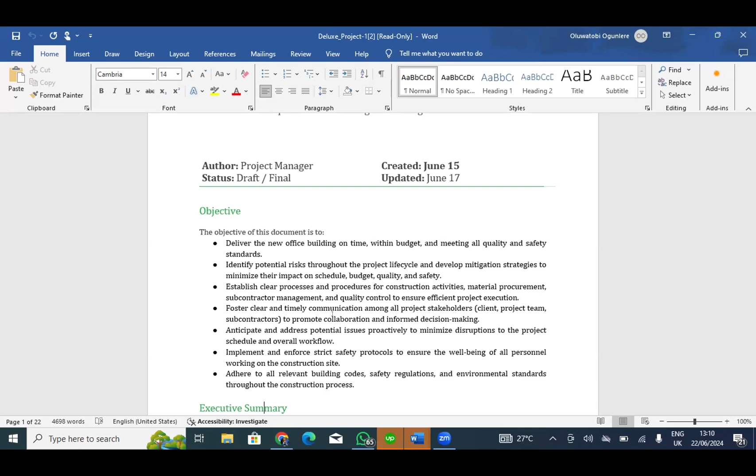Yes, we have some risks - what are the risks that could occur and how we're going to mitigate them. The first is schedule delay, maybe because of financial issues, maybe we won't start on time and the likes. The likelihood of this risk is medium, the impact is medium, and the risk rating is still medium. How to mitigate it? We're going to develop a detailed critical path method schedule with a buffer, and we're going to identify and secure critical materials early, which we have also done. We'll also maintain a contingency plan for all unforeseen events.

Who's going to be responsible? That's the project manager, which is Emmanuella.

Second, budget overruns. What if the budget we are presenting is not enough for this project? That's a high risk, and the likelihood is medium, but the impact is high, because if the budget is not enough, the project won't be able to achieve success on time. The risk rating is also high.

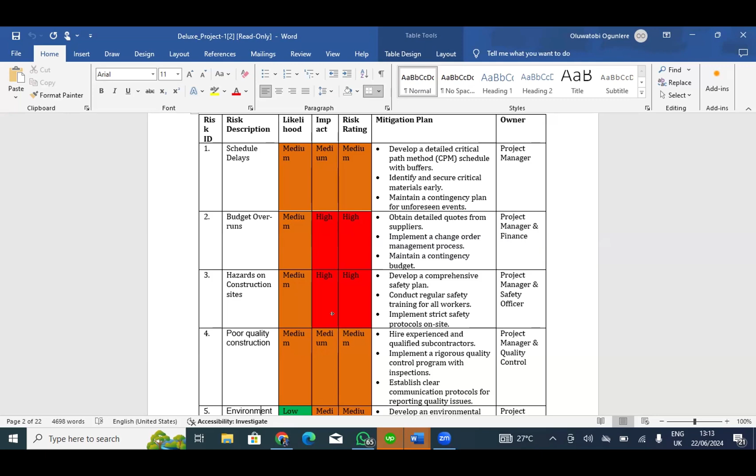The mitigation plan: we have developed a comprehensive safety plan, conduct regular safety training for all workers, and implement strict safety protocols on site. Those in charge are the project manager and the safety officer.

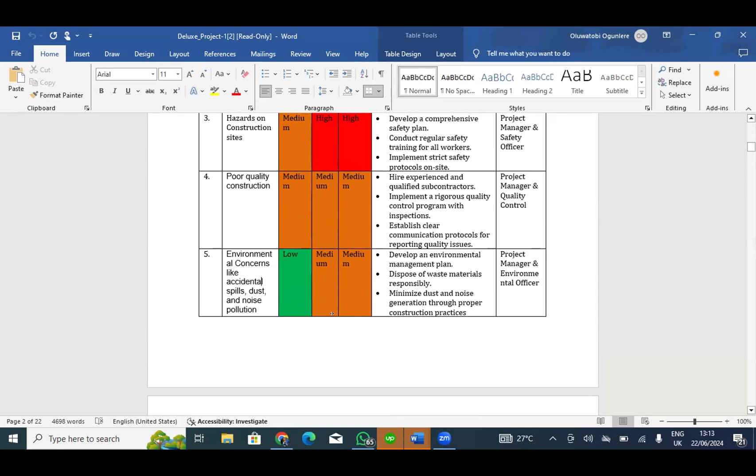There are lots more like that, such as poor quality construction, environmental concerns like accidental spills, dust, and noise pollution, delays in obtaining necessary permits, difficulty in finding workers, unexpected shortages of critical materials, encountering unexpected site conditions such as hazardous materials or weather, and client scope changes.

We know that one is very critical, where the client's scope might change. They may say they want this plan, maybe they want one side of the construction to be in another form, another design, and everything.

The impact can be low, so this is also medium, and the risk is also medium. What we're going to do to mitigate this risk is establish a clear change order process with defined approval protocols.

If there's any change, we're going to write to the client, since they are the project sponsor, and tell them we are doing this change, this is what it's going to cost, and this is going to be the duration. There should be a clear change process and good communication.

We're going to maintain open communication so we could achieve that goal, while they know that achieving it could also affect the duration of this project. So there must be a good communication balance. Those in charge are the project manager and the client's representative, Miss Oluwatobi.

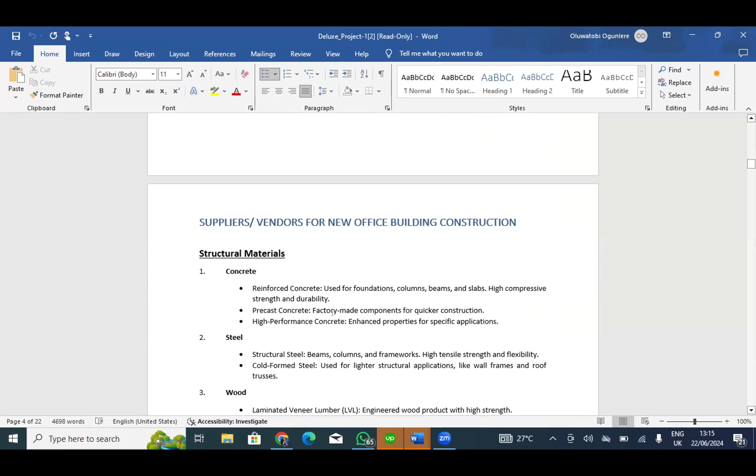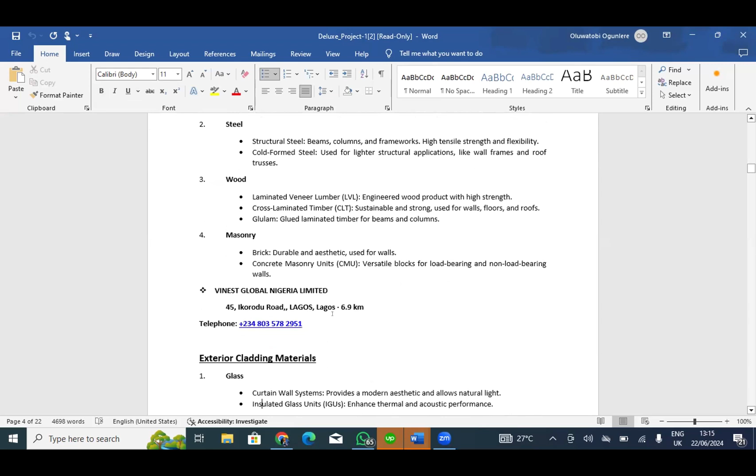We have a list of suppliers, vendors, and their addresses. Suppliers like concrete, steel, wood, and masonry we are getting from Vinest Global Nigeria Limited, at 45 Ikorodu Road, Lagos, 6.9 kilometers. The phone number is listed there.

Also, insulation materials - fiberglass insulation, foam board insulation, and spray foam insulation - we're getting from 5 Wema Terrace, Lagos, 12 kilometers, phone number also listed.

Our roofing materials, that's asphalt shingles, metal roofing, the bituminous roofing, and EPDM rubber roofing, which is also used for low slope buildings, we're getting from Wish Tech, located at 5 Wema Terrace, Lagos, 12 kilometers. We also have the phone number here.

The interior finishing materials aspect - drywall, flooring, ceiling - we're getting from Rotary Club of Victoria Island, Lagos, at number 28 Awolowo Road, Ikoyi, Lagos.

Also sustainable, innovative materials such as green concrete, bamboo, recycled steel, low-e glass, phase change materials, and the like, we are getting from Vinest Global Nigeria Limited, about 45 Ikorodu Road. We also have the number there.

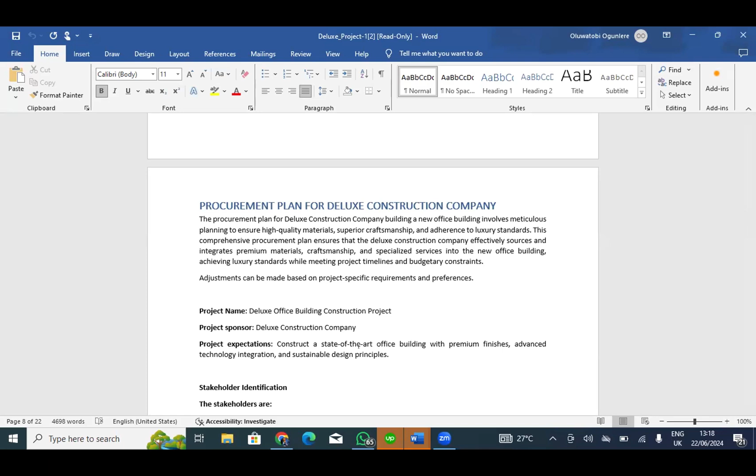TSS Academy, the building needs to be enticing. You need to preach the good works through the building, you know, because TSS Academy is doing great works impacting lives. The building must also resonate with the vision and impact that they are doing, so you have to give them the quality.

That's it, and you have the stakeholders. The stakeholders: we have the company, which is Deluxe Construction Company, the employees, that's the team, the suppliers, which I've listed before, the project manager, that's Emmanuella, and the project team, Oluwatobi, and we have government agencies.

Depending on the permits needed, we go to different agencies that will come for on-site supervision, and those that we go to get permits from. We have the architects, the engineers, the interior designers, and those are the major people.

Without boring us, let me go to the last aspect. We also have the monitoring, documentation, and reporting, that's the risk management, which I've stated earlier, the supplier selection and contract negotiation.

So we get insurance from them. When getting the supply, we'll try to evaluate them, also seek for negotiation. That is why we went to meet the wholesalers directly from the factory, so we can get a discounted price. We can also negotiate price to help us get quality material at a discounted price, so we could save cost.

Implementation, yes, we have implementation and monitoring. We're going to conduct regular site inspections, quality audits, progress meetings to maintain high standards and address any deviation promptly. Documentation is also important, a key in this project, and we have plans to keep regular documentation within the team and also to the sponsor and the client, which is also TSS Academy.

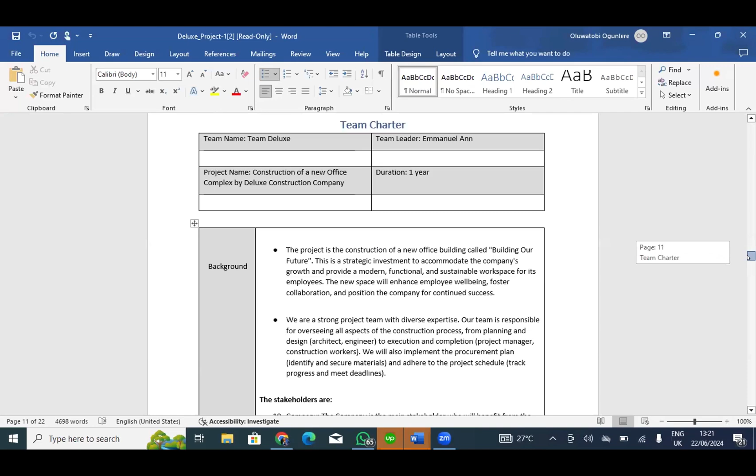The background for this team charter is that this project is a strategic investment to accommodate TSS Academy's growth and provide a modern, functional, and sustainable workspace for the employees. This new space will enhance employee well-being, foster collaboration, and position the company for continued success.

Yes, and we are a strong project team with diverse expertise. Our team is responsible for overseeing all aspects of the construction process, from planning and designing, architects, engineering, to execution and completion. So we are there, and like I mentioned, the stakeholders earlier, and the mission.

The mission objective for this is to build a new complex by the end of the year, which I've stated earlier. And the success we're looking towards for this project completion is that it's on time and within budget, quality construction, functional workspace, sustainable features, and employee satisfaction.

And this is going to result in accommodating growth for TSS Academy and enhance their productivity, improve their employees' well-being, promote their collaboration and innovation, strengthen their brand image, and also make it a sustainable practice for them.

Yes, the estimated budget for this project is 7.5 billion naira only. These resources are connected to financial resources, that's for construction cost, materials, labor, and permits, and also the human resources for construction management, architecture, engineering, operation sustainability, and also material resources in terms of buying things like construction materials, concrete, steel, as well as being secured through the procurement plan.

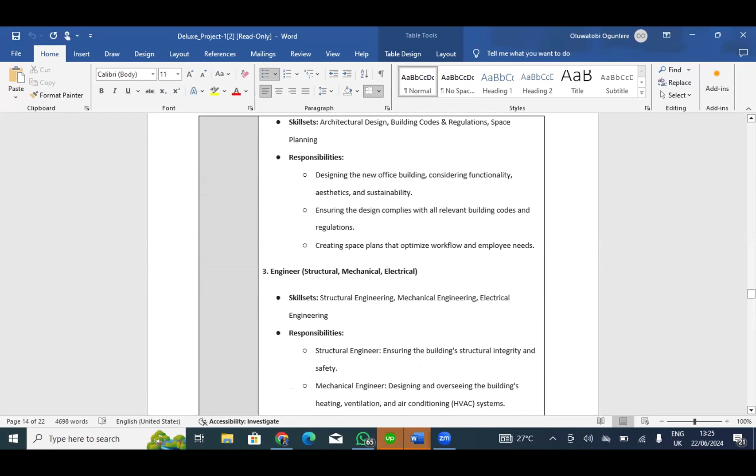We have the architects, who are not part of the team but we hired to support one of the workers. Our skill set is architectural designs, building codes and regulations, space planning and likes. We also have the engineering aspect, the structural engineers, mechanical engineers, and electrical engineers, who make sure that the building will be standard and well mechanized, and the electrical aspect is also of good quality.

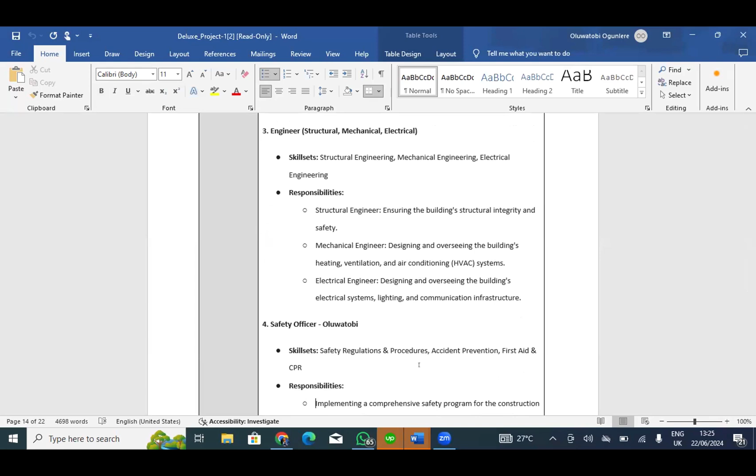I am the safety officer. My skill set includes safety regulations and procedures, accident prevention, first aid, and CPR. I'm also a certified HSE officer. My responsibility is implementing a comprehensive safety program for the construction site, conducting regular safety inspections and ensuring adherence to safety protocols, and providing a safety training to the construction workers.

My duty is that at least no accident must occur. If it's even going to occur, it will be very minimal, maybe one out of 1,000. Very, very minimal. In short, my goal is that it must not even occur, so all procedures, everything must be where I adhere to.

You have the quality control expert, that's Omolola. As Chris said, she's part of the construction quality standard group. She handles all the quality and everything, the material inspection, the building code and compliance. She's in charge of every aspect of that.

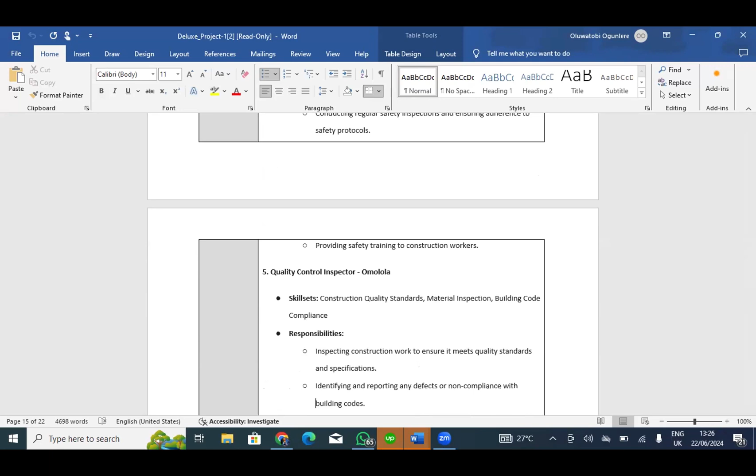Our duty is to inspect construction works to ensure that the construction meets quality standards and specifications. She wants to identify and report any defects or non-compliance issues with building codes, and work with contractors to rectify any quality issues.

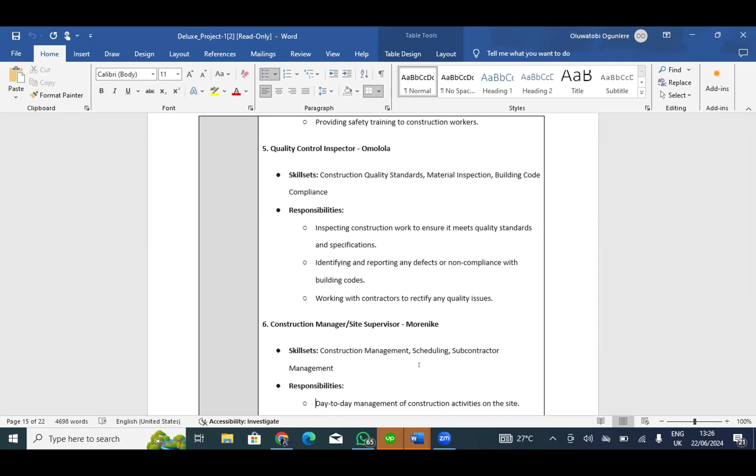We also have the construction manager, the site supervisor, that's Morenike. She's also a construction management officer handling scheduling and subcontractor management. Our duty is day-to-day management of construction activities on the site, overseeing subcontractors and ensuring that they meet deadlines and quality standards, but also coordinating deliveries of materials and equipment, and maintaining project documentation and records.

We have the authority levels, that's project manager, Emmanuella, and the team members including Oluwatobi. We are the decision making authority.

Let me just check because team operations. For operations, we identify the issues, information sharing, we discuss and brainstorm. We've been doing that for the past week now, working towards everything, doing the budgeting, analyzing the schedule, quality assurance, and everything. We've been working all around the clock, doing evaluation and consensus, documentation and communication.

Our operating relationship is built on respect and open communication. Meetings will be held weekly or bi-weekly to discuss progress, address issues, and make decisions. For conflict resolution, if there's any disagreement, team members will focus on avoiding personal attacks. Issues beyond the team's authority will be escalated promptly to the project manager or client representative for resolution.

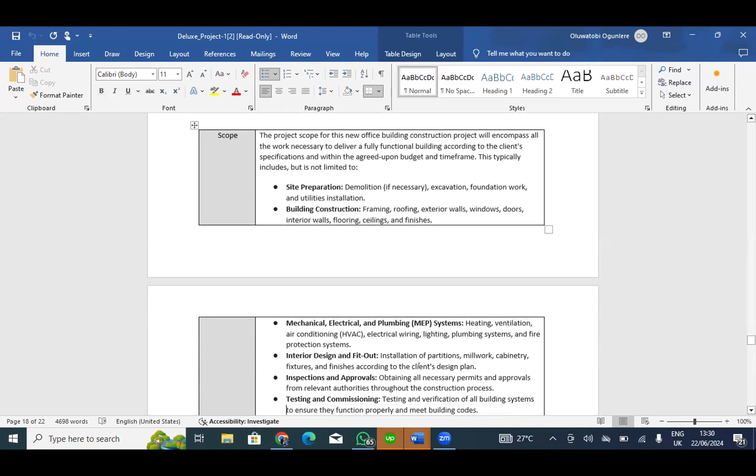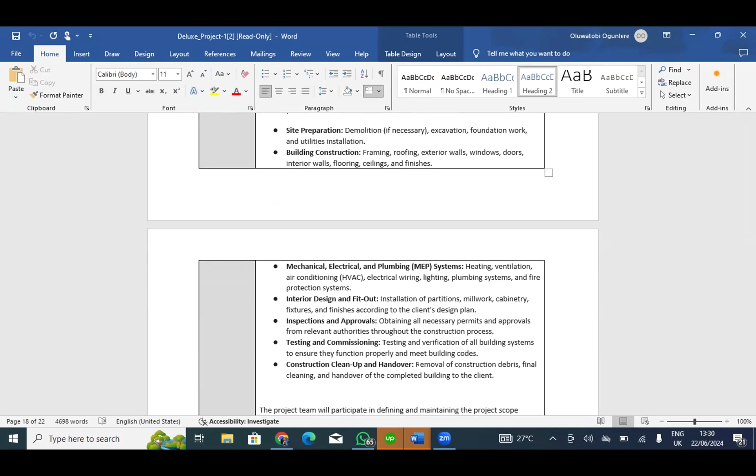Excavation, foundation work, and utilities installation, the building construction too. We also work on that. We also have mechanical, electrical, and plumbing systems. We also have interior design and fit-out. We also have inspections and approvals, testings and approvals. Yes, the Lagos State government will need to inspect and approve, so you can get the permits. We have testing and commissioning. We also have construction cleanup and handover.

The project will participate in defining and maintaining the project scope throughout the project lifecycle in several ways: through our kickoff meeting, our technical inputs, the risk management which we will analyze, change management, progress meetings, and the like.

Our performance assessment, how we want to assess if we are progressing or not. We're going to have a series of performance assessments. For the first one, schedule performance, we'll assess that through physical completion of major construction milestones, for instance foundation completion, framing completion, compared to the baseline schedule. If all these are completed, we tick completed.

We also have critical path method, CPM, which we use to monitor deviations, if there's any deviation for the critical path of the project schedule.

Budget performance: we're going to compare the budgeted cost of the work scheduled with the actual cost of the work performed. The budget that we plan to use and the amount we actually spent, we're going to check it and compare.

Quality performance: yes, there will be regular inspections by qualified personnel, like Omolola, who will continue to ensure construction adheres to plans and specifications.

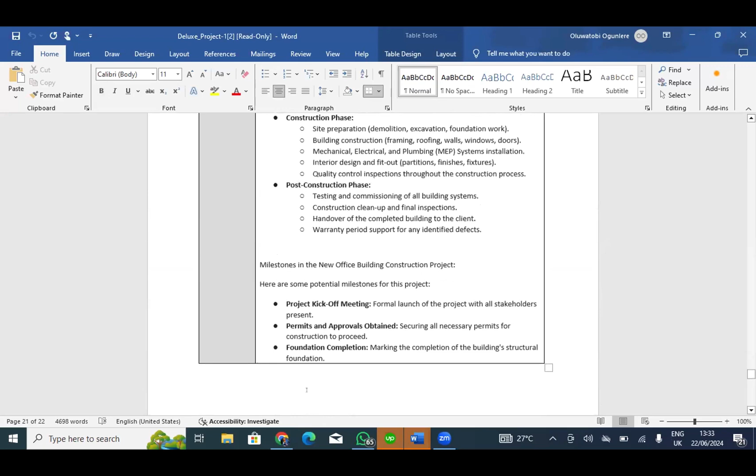The next one, activities and milestones. That's the pre-construction stage: getting permits, doing the project plan, which has been done, the budget and risk register, which have been done, and secure the permits, which we're also working on. If we can get approval from TSS Academy, we kickstart that.

Construction: procure construction materials, we've gotten the contacts of our suppliers, and finalize construction design drawings and specifications.

With the information we got from TSS Academy, they didn't tell us the number of floors that they want, and they didn't tell us the number of acres of land they want to build on. So we're waiting for that instruction so we can know what TSS Academy wants, whether a 10-story building or something else. This will help us fine-tune everything and make it more beautiful. And how many acres of land, or how many plots? These things we're also waiting for TSS Academy to provide to us.

Also in the construction phase, after we get the number of floors that TSS Academy wants, and the size of land—is it 600 square meters, or 1,002, or 5,000, or 10,000 square meters—then from there we can go to the construction site. If there's any demolition, we'll do it. If there's any excavation, we'll start excavation and the foundation work.

The building construction: the framing, the roofing, the walls, the windows, and the doors. Mechanical, electrical, and plumbing, the interior design and fit outs. Quality control inspections throughout the construction process, following the desires of TSS Academy and everything.

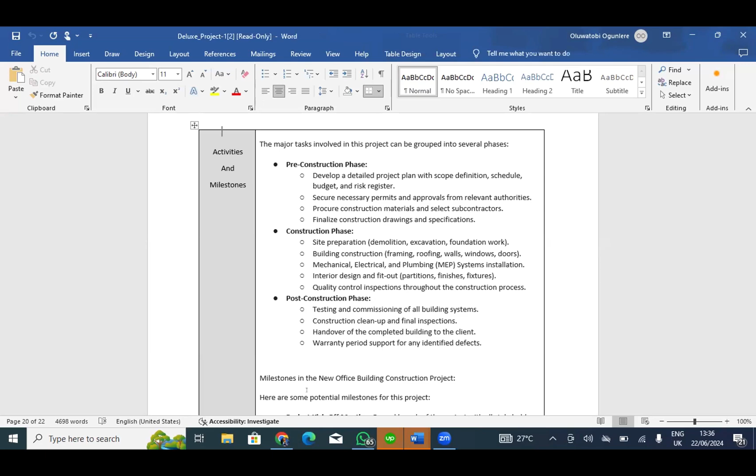Yeah. So, let me buttress my point there because of time. Yes.

These are the team members. Emmanuella, the project manager. We have Emmanuella, we have Morenike, I have Oluwatobi Ogunlere. There is one more document I will also love to share with us. One last document, so sorry, a moment please, just one last document.

So yes, that's the RACI matrix for this project, showing the tasks and everything, since our client demanded for it.

So we have to show our clients, TSS Academy and our project sponsors from TSS Academy, this RACI matrix. We have 9 tasks. The first task is overseeing all aspects of the project from plan to completion.

That's Emmanuella, she's the one in charge. I will be accountable. Emmanuella is accountable, Morenike is accountable, you're all accountable. Designing the new office building.

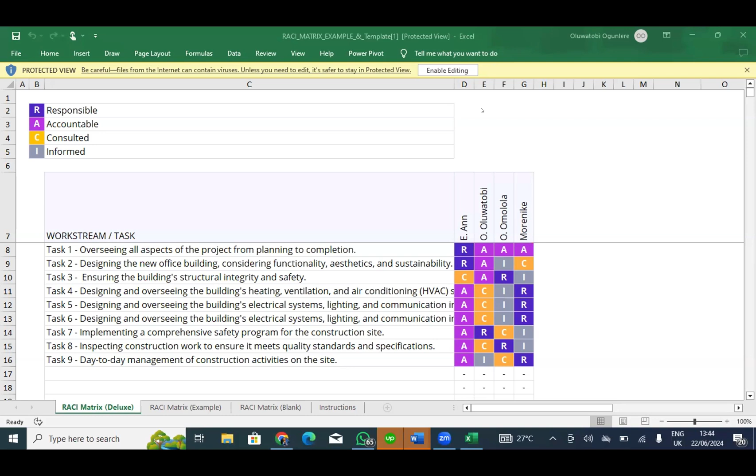And I think that's all for this group. Is there another group?